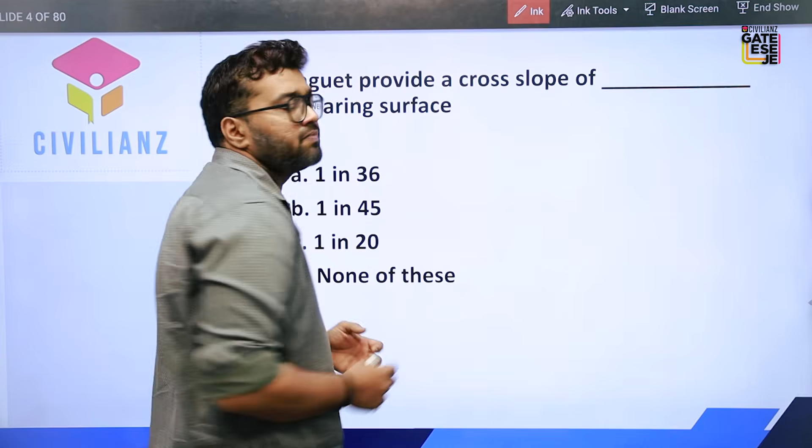Tresaguet provided a cross slope of dash to the wearing surface. So after Roman roads, then came Tresaguet method of road construction. He provided a cross slope at the wearing surface. At the top surface, he provided a slope, to drain off the rainwater.

So what is the slope provided by Tresaguet? The correct answer is 1 in 45. The cross slope provided by Tresaguet is 1 in 45, that means 1 vertical to 45 horizontal. This is the cross slope provided by Tresaguet.

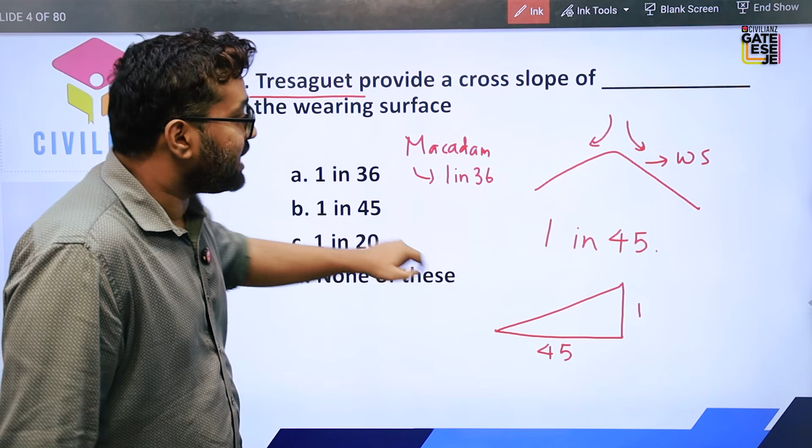One more important thing, the cross slope provided by macadam is 1 in 36. So cross slope provided by Tresaguet is 1 in 45 and cross slope provided by macadam is 1 in 36, John macadam is 1 in 36. Tresaguet provided the cross slope only at the wearing surface, but macadam provided cross slope in every layer.

So the correct answer is option B, 1 in 45. Next question.

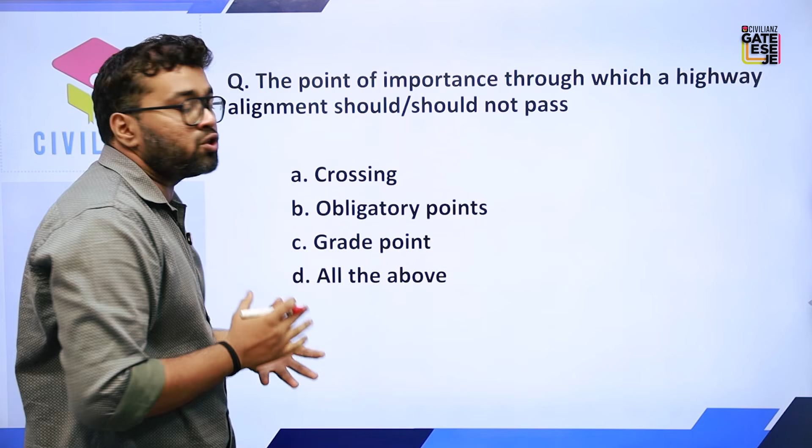The point of importance through which a highway alignment should or should not pass - what is the answer? The correct answer is option B, obligatory points. Obligatory points are some points where alignment should pass or should not pass. You should learn it.

So what is an alignment? Alignment is the position or layout of the center line of a highway, and the position depends on some points. We cannot create road everywhere. If there is a costly structure near, we cannot destroy that structure and construct a road there. So this type of points where alignment cannot pass or should pass is called obligatory points.

So the points where alignment should pass or should not pass is called as obligatory points. The correct answer is option B, obligatory points. Next question.

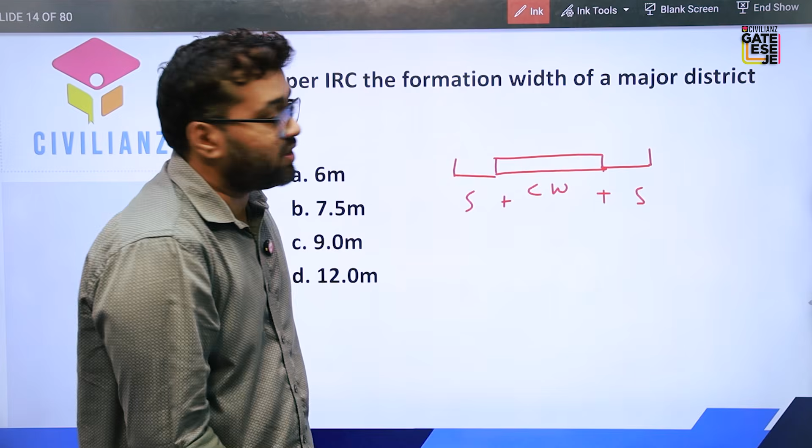So the question is, what is the formation width for a major district road? Formation width is carriageway, the pavement, plus shoulders on both the sides. The correct answer is option C, 9 meter, and we can just look at the values.

This is for plain and rolling terrain only. So first case is NH or SH, national highway or state highway - the formation width is 12 meter.

Second, for major district roads, the formation width is 9 meter. Then for other district roads: if the road is single lane, then 7.5 meter, and if it is 2 lane, then it is 9 meter.

For village roads, the answer is 7.5 meter. So you should by heart all these values: for national highway and state highway, the value is 12 meter; for major district road, it is 9 meter; for other district road, single lane 7.5 meter, and for 2 lane roads 9 meter; and for village roads it's 7.5 meter.

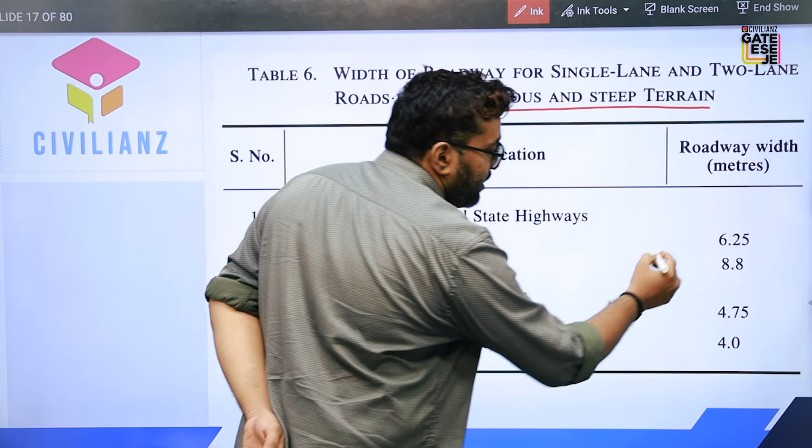This is only for plain and rolling terrain. When it comes to mountainous or steep terrain, for NH and SH - national highway and state highway - if the road is single lane, the formation width is 6.25 meter, and if it is two lane, the formation width is 8.8 meter.

For major district roads, MDR, and other district roads, ODR, the formation width is 4.75 meter, and for village road it is 4 meter. This is only for mountainous and steep terrain. So you should learn all these things, and if it's confusing, at least learn the values for plain and rolling terrain.

Next question. The recommended camber for water bound macadam is... So the question is, what is the recommended value for camber for water bound macadam? The correct answer is option B, 1 in 33 to 1 in 40. The values are given in the code. It is easy to learn, so let's just look.

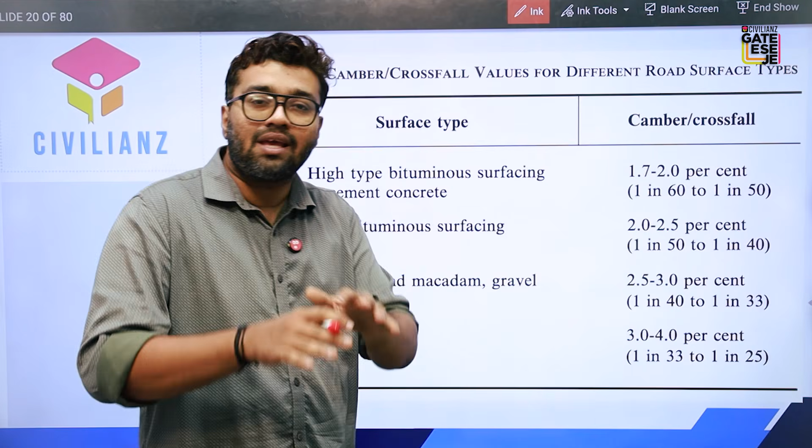The camber is the crosslope provided on the road to drain off the rainwater. So the value of camber depends on two factors: the type of pavement, and the rainfall amount in that area.

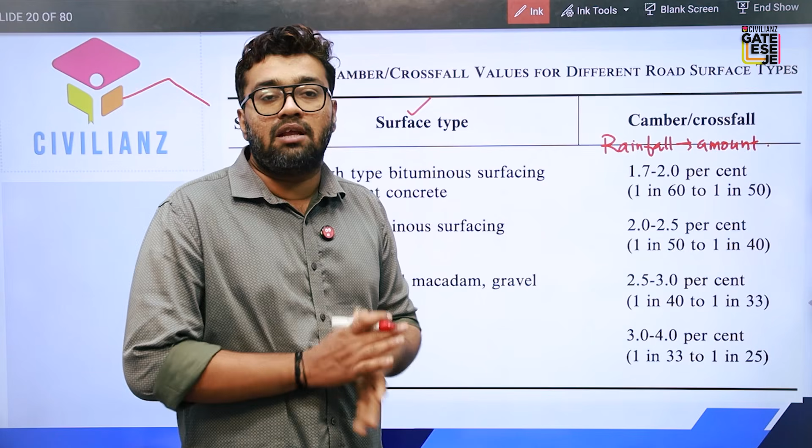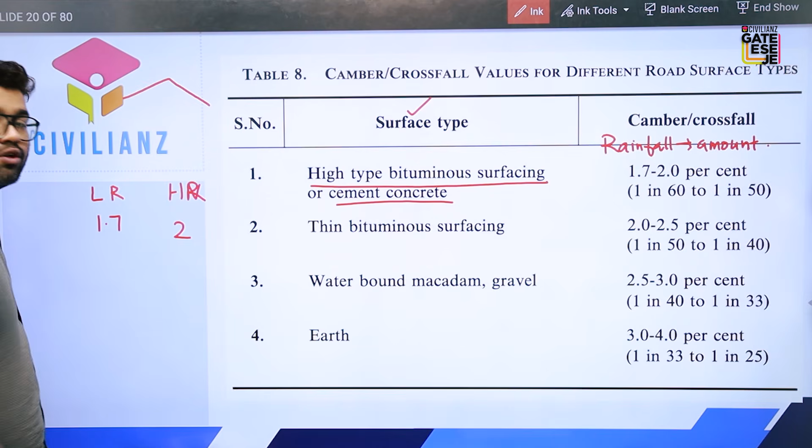We can learn these values easily. Based on amount of rainfall, we can classify it into light rainfall and heavy rainfall. The first road condition is high type bituminous surfacing or cement concrete roads: for light rainfall it is 1.7, and for heavy rainfall it is 2.

In case of thin bituminous surfacing, we should write this value here: it will be 2, and this will be more than that - 2.5. If more rainfall comes, we want to increase the slope.

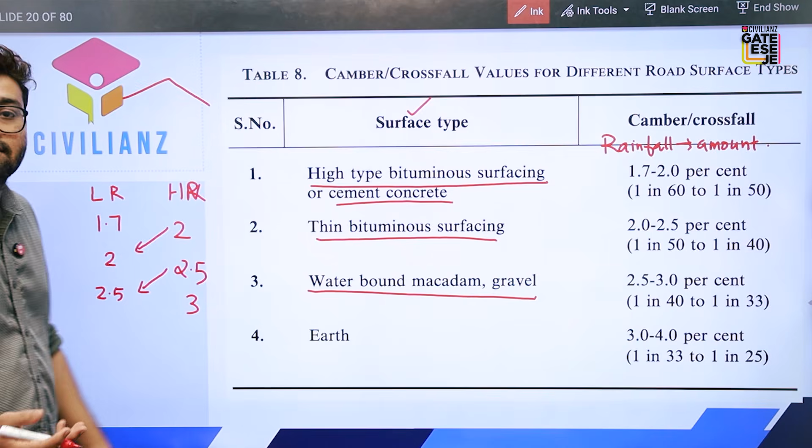Third case, water bound macadam or gravel roads: we can write this value here, 2.5, and at heavy rainfall we get 3. Last case is earthen roads: we can write 3 here, and the value here is 4. So we can easily by heart these values.

You should by heart these values, and it's given in percentage.

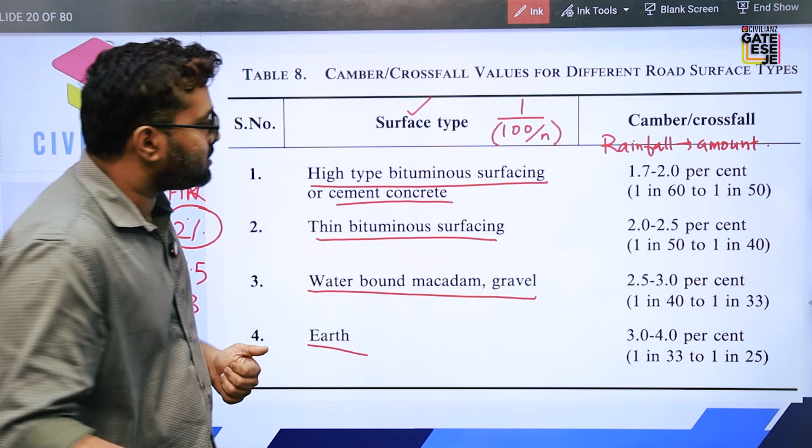For some people it will be difficult to convert this percentage to the ratio value, right? It's very simple. Just learn this equation: 1 by 100 divided by the percentage value. So in this case, it's 2%, so 1 by 100 divided by 2 is equal to 1 in 50.

Okay, we can take another value, 2.5. So what will it become? 1 by 100 divided by 2.5. 100 divided by 2.5 is 40. So the value is 1 in 40.

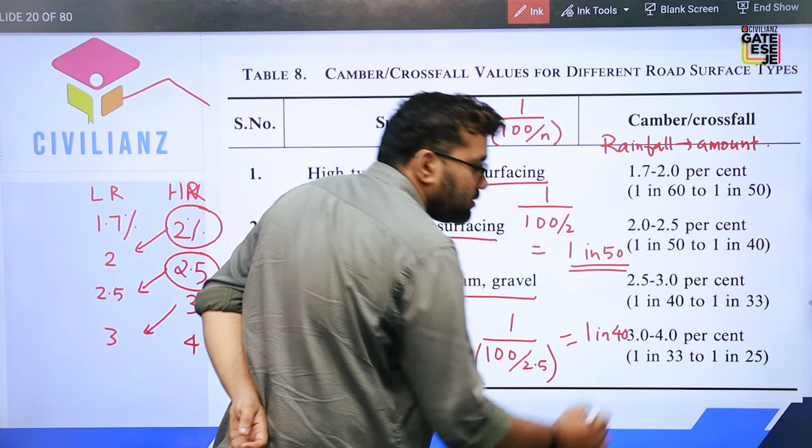It's that simple. We can take 3. Okay, 1 by 100 divided by 3. 100 divided by 3 is 33.3. So the answer is 1 in 33.3. Okay, it's that simple. So you should just learn these values.

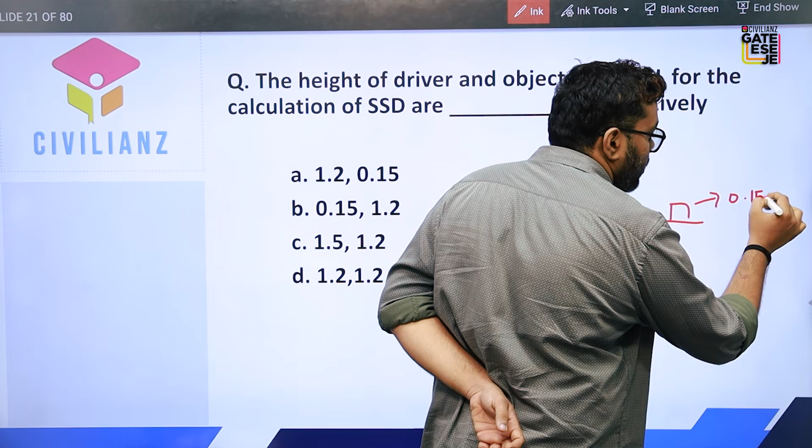Next question. The height of driver and object above ground level for calculation of stopping sight distance are dash meter respectively. Our car is going and there is an object here. Therefore, for calculating SSD, the eye level of driver is 1.2 meter, and the object is 0.15 meter. For calculating stopping sight distance, the height of observer is 1.2 meter and the height of object is 0.15 meter. So the correct answer is option A.

For calculation of OSD or ISD, the observer and the object are at a height of 1.2 meter. So for stopping sight distance, height of eye level of observer is 1.2 meter, height of object is 0.15 meter. And for overtaking sight distance, both height of observer and height of object are taken as 1.2 meter. Here it is 1.2 meter and 0.15 meter, and here it is both 1.2 meter. So the correct answer is option A: 1.2 meter and 0.15 meter.

Okay, next question. What is the safe SSD required for a vehicle traveling with a speed of 100 km per hour under ideal condition? So we know the equation, right? Vt plus V square by 2gf, where V is the design speed in meter per second.

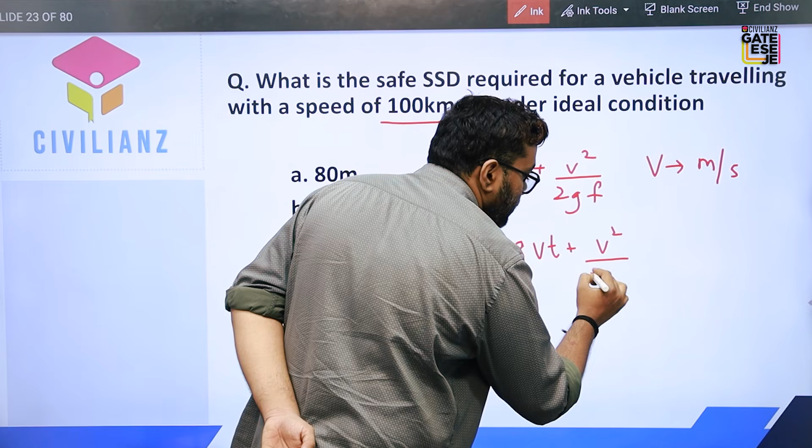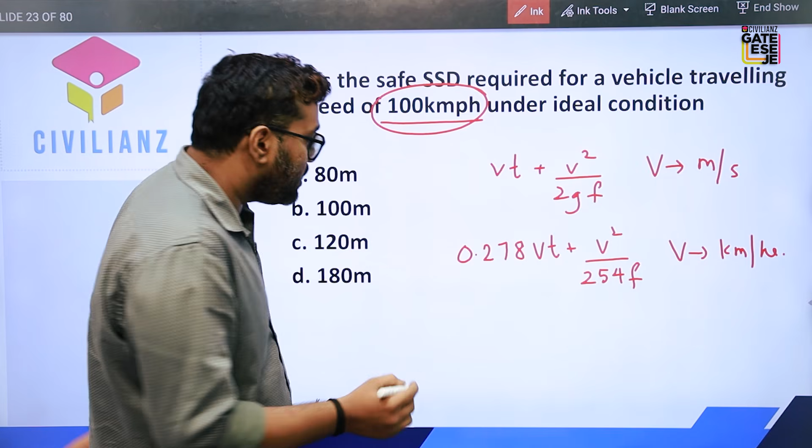Otherwise, you know another equation: 0.278Vt plus V square by 254f, where V is in kilometer per hour. We know two equations; we can use either of them to solve this. In this question, it's given 100 km per hour, but other values, the time is not given and the coefficient of friction is not given.

But we know that for 100 km per hour, the friction value is 0.35 and the time is 2.5 seconds. We know these values, so we can either substitute them and find the answer, or we can just refer the codal values. Let's check. So the correct answer is 180 meter. We can come to it.

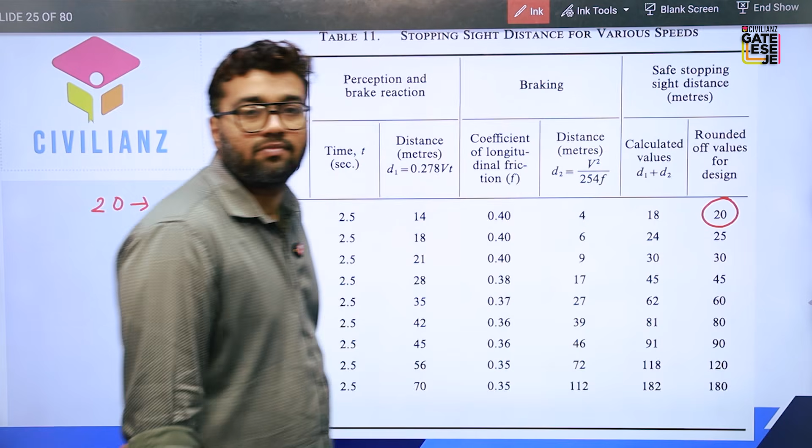For design speed 20, the stopping sight distance is 20. For design speed 25, stopping sight distance is also 25. And for 30, the value is 30. So it is easy to learn these three values, right?

Then we go to 40. When the design speed is 40, we have an easy formula: we can just add 5 to it. We will get 45.

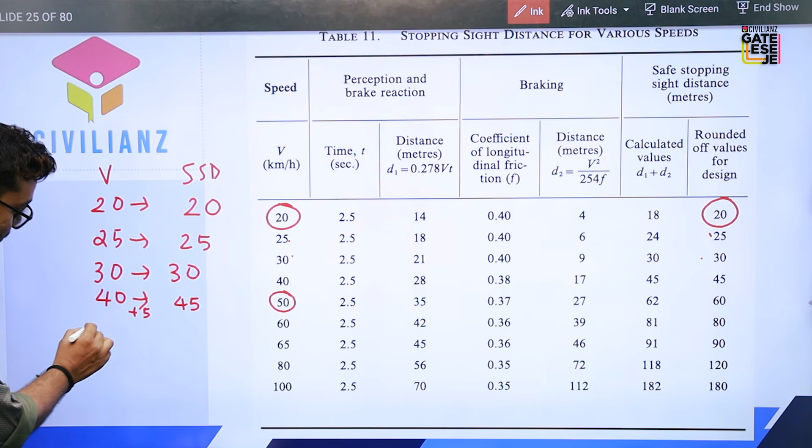Then when design speed is 50, we can add 10 to it; we will get 60. For design speed 60, we can add 20 to it, so it will become 80.

For 65, we should learn it separately: for 65, it will be 90. We can just leave that aside.

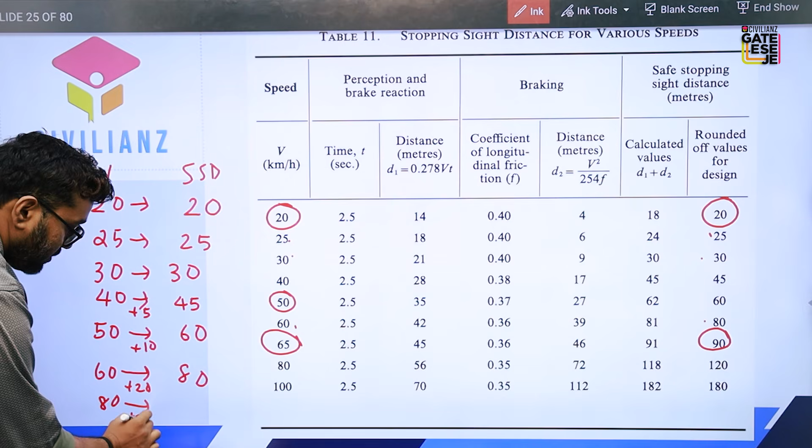For 80, we can add double of 20, which is 40, so we get 120. And then for 100, we add here 40, right? We can add 80, so we'll get 180. So these values are easy to learn by heart.

You can just look at this pattern and it's easy to learn. For the first three values, up to design speed 30, the design speed and stopping sight distance will be equal. After that, for 40 we add 5, for 50 we add 10, for 60 we add 20, for 80 we add 40, and for 100 we add 80. Double of 5 is 10, double of 10 is 20, double of 20 is 40, and double of 40 is 80. So it is easy to learn these values. Just remember, for 65 it is 90. Okay, next question.

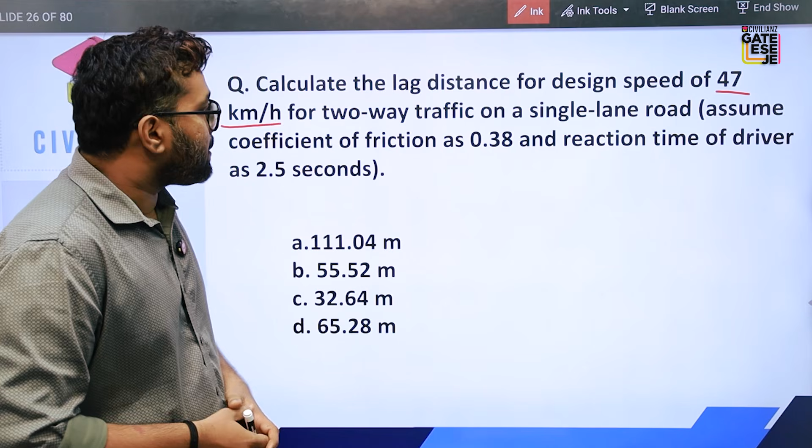Calculate the lag distance for the design speed of 47 km per hour. The design speed is 47 km per hour for two-way traffic on a single lane road.

Coefficient of friction is 0.38 and reaction time is 2.5 seconds. Okay, we can do the question.

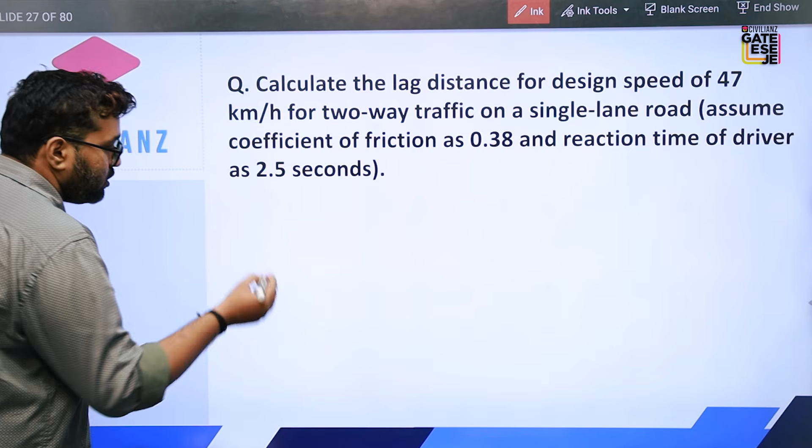Okay, we know the equation, right? SSD is equal to Vt plus V square by 2gf, where V is in meter per second.

So in this equation, this represents the lag distance, and this represents the braking distance.

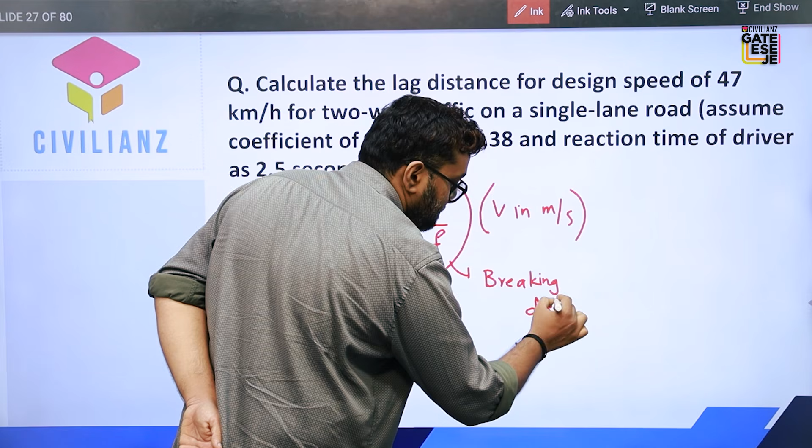So when we are going in a car and we suddenly see an object in front, we will just see the object and then apply brake. The time between seeing the object and application of brake is called the reaction time. And in this time, the vehicle will move at the same speed. The vehicle will be slowed down only after the brake is applied.

So the distance moved in the reaction time is called the lag distance. So in this question, only the lag distance is asked. So we can just write lag distance is equal to V into T, where V is in meter per second.

We can convert. Here the question is given as 47 km per hour, so we can write it as 47 into 5 by 18. To convert kilometer per hour into meter per second, we just multiply by 5 by 18.

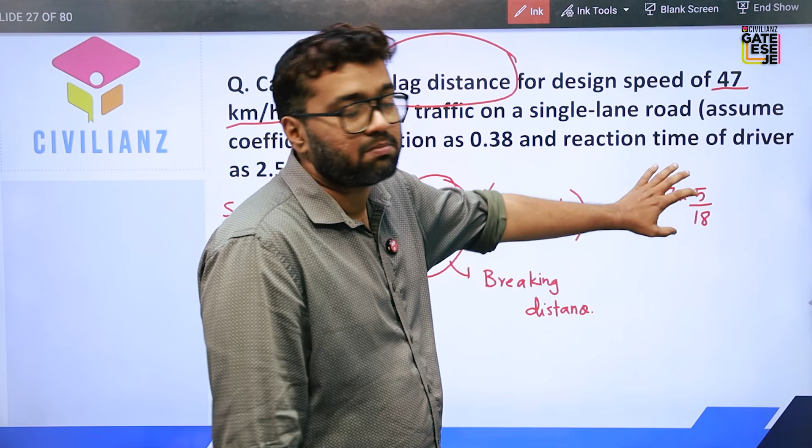Then T is given as 2.5 seconds, the reaction time. So we can just substitute: lag distance is equal to velocity 47 into 5 by 18 into t, time is 2.5 seconds. We can just multiply it.

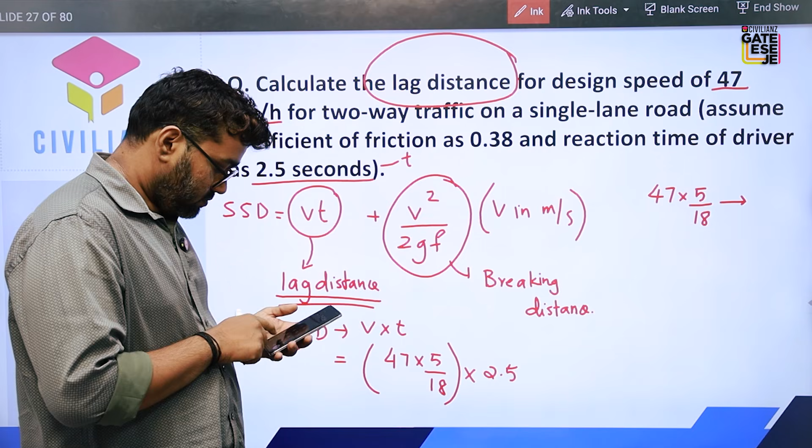So we will get the answer 32.64 meter. But there is a problem.

We know that it's a two-way traffic, right? It's a two-way traffic on a single lane road. So vehicles are coming from both directions.

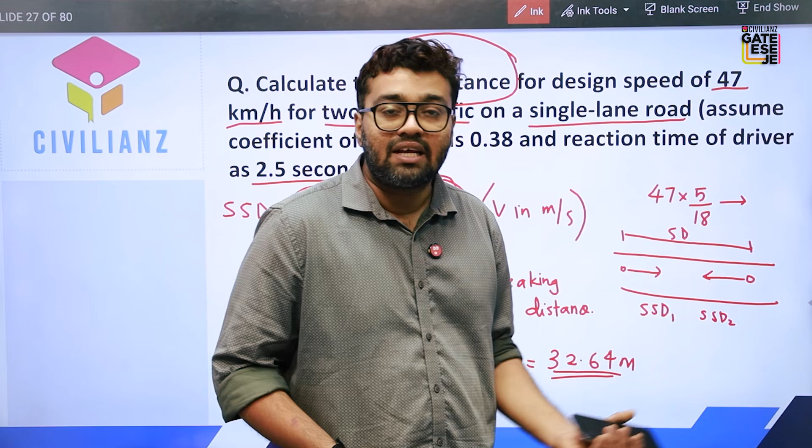So the minimum sight distance should be SSD of this vehicle plus SSD of that vehicle. Otherwise, if two vehicles come and we are not providing enough SSD, what happens? The first vehicle will apply brake and it requires minimum SSD1 to stop, and the second vehicle requires SSD2. If both these values are not given, the vehicles will collide. So the minimum required distance is SSD1 plus SSD2.

But it's the same road, right? Same road, same design speed. So we can write SSD plus SSD. Both SSD1 and SSD2 will be equal, so it's equal to 2 into SSD. For a single lane road with two-way traffic, the minimum sight distance available should be 2 into SSD.

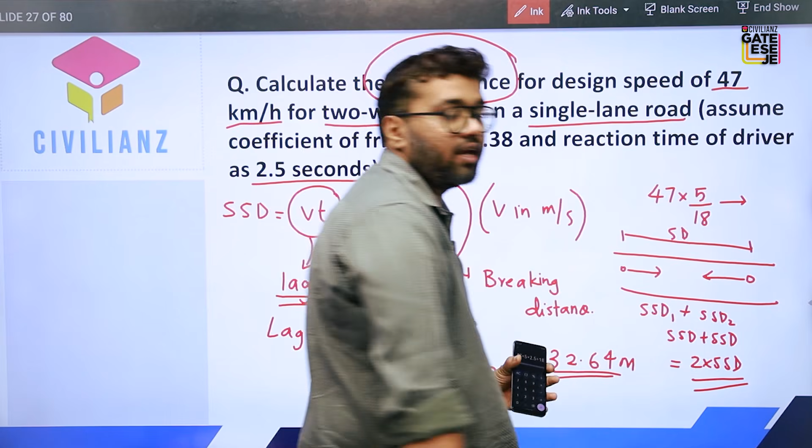Otherwise, the vehicle will collide. If you are providing only one SSD, one vehicle can stop, but the second vehicle will collide.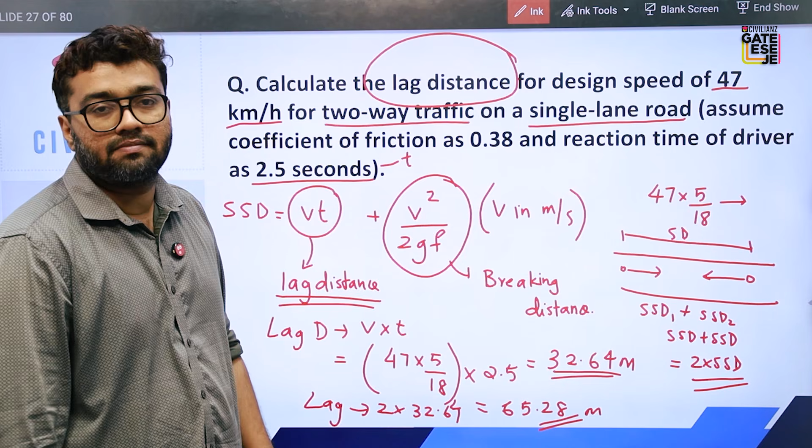So here we can just multiply, the lag distance will be 2 into this value, 32.64. So it will be 65.28. The value will be 65.28. Okay, so you get the solution.

So the correct answer is option D, 65.28. Shall we move to the next question?

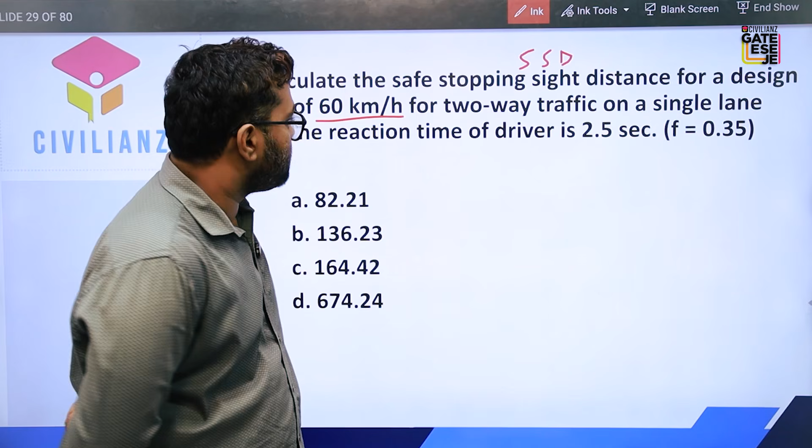Okay, so the next question: calculate the safe stopping sight distance, SSD, for a design speed of 60 km per hour. Design speed is 60 km per hour for a two-way traffic on a single lane road.

So in this question also, it is two-way traffic on a single lane road. So SSD, the minimum sight distance, is 2 into SSD. So remember it, okay? Remember it. For a single lane road with two-way traffic, the minimum sight distance is 2 into SSD.

The reaction time is 2.5 seconds and coefficient of friction is given as 0.35. So it's a simple question. We just want to find the stopping sight distance and we know the equation.

The design speed is given in kilometer per hour, so we can write the equation SSD is equal to 0.278 Vt plus V square by 254F. It will become 0.278 into velocity 60 and reaction time 2.5 seconds, plus 60 square divided by 254 into F value 0.35. It's a simple equation, you can find the answer.

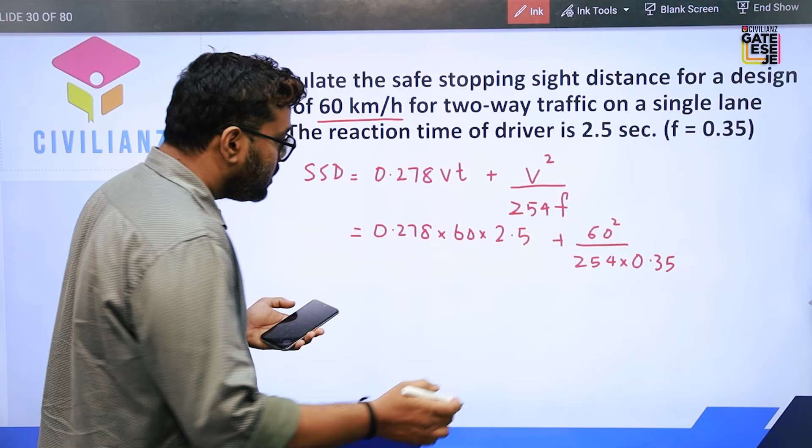The value will become 82.19. But in the question it is two-way traffic on a single lane road.

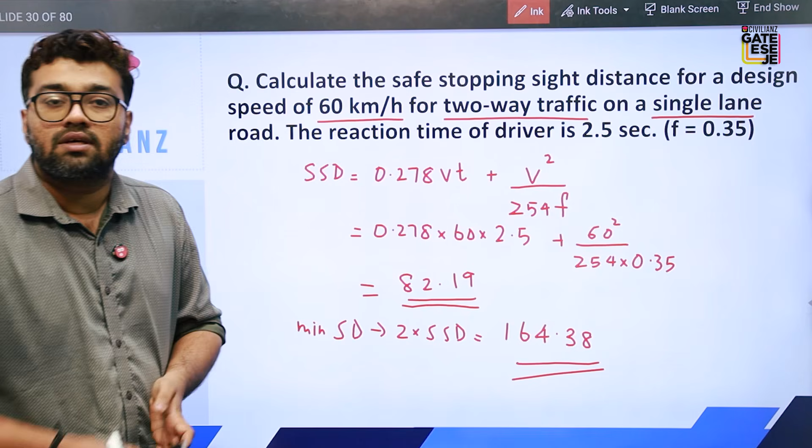So minimum sight distance is equal to 2 into SSD. It's equal to 164.38. So the correct answer is option C, 164.42.

Okay, next question. Two cars are moving in opposite directions with a speed of 25 meter per second and 20 meter per second. The first car is moving at 25 meter per second and the second car at 20 meter per second. If total reaction time is 2.5 seconds...

Design coefficient of friction is 0.35. Then what must be the minimum sight distance to avoid collision?

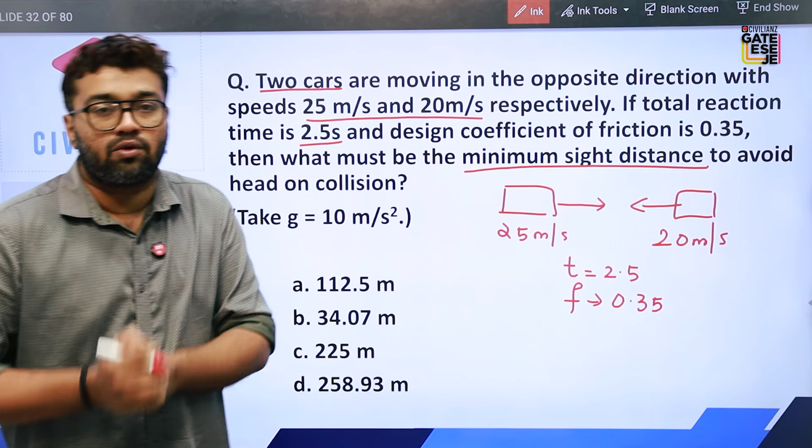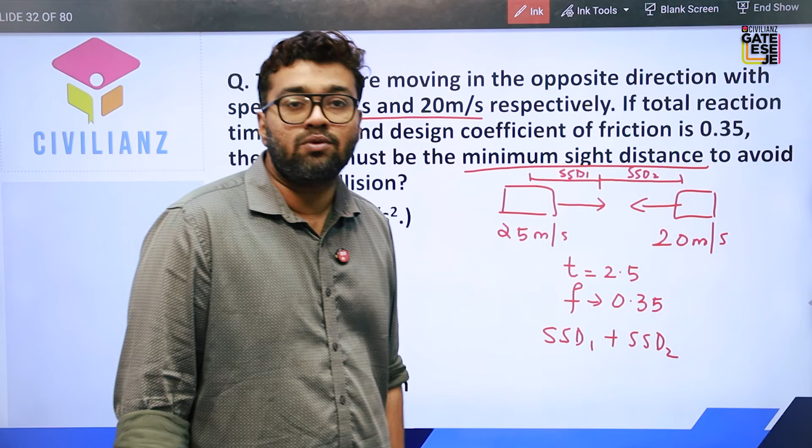If both vehicles are coming in opposite directions, minimum sight distance required is: if the first vehicle applies brake, it should stop, and the distance where it stops is SSD1. If the second vehicle applies brake, it should stop at distance SSD2. So minimum distance that should be available to avoid the collision is SSD1 plus SSD2. We can find SSD1 and SSD2 and then add the values. It's that simple.

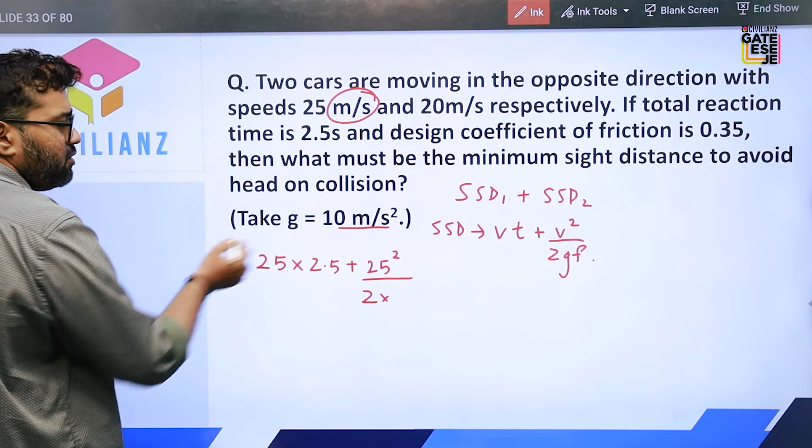SSD1 plus SSD2. The SSD equation is SSD equal to Vt plus V square by 2GF, because the speed is given in meter per second. So SSD1: the first vehicle is moving at 25 meter per second, so 25 into reaction time 2.5 plus 25 square divided by 2 into G value 10 into F 0.35. This is the equation for SSD1.

Then SSD2 is again, velocity 20 into 2.5 plus 20 square divided by 2 into 10 into 0.35. Okay, we can just calculate it.

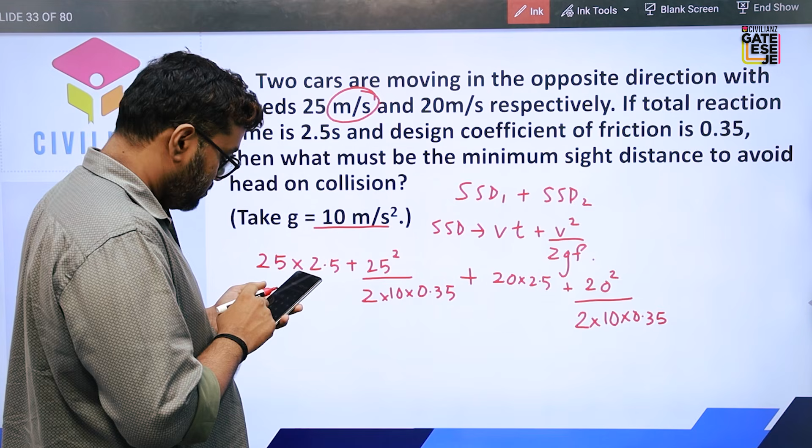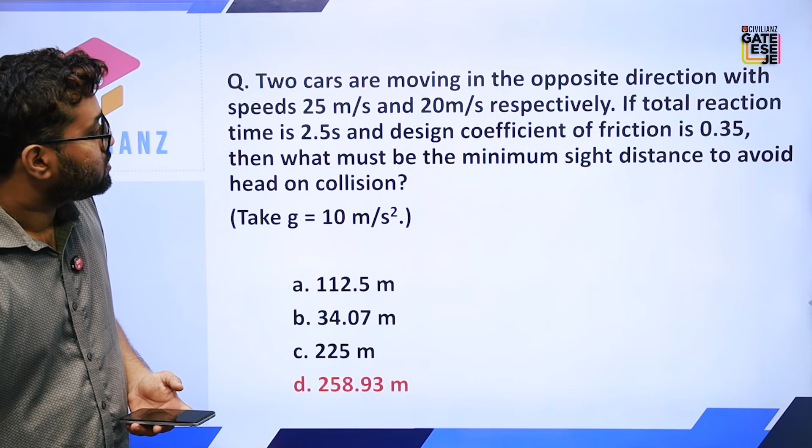So we will get the answer as 258.93 meter to avoid collision. So the correct answer is option D, 258.93 meter. Okay, we can go to the next question.

Calculate the safe stopping sight distance for a descending gradient of 3%, for a design speed of 80 km per hour, taking coefficient of friction as 0.35 and total reaction time as 2 seconds. Normally we take it as 2.5 seconds, but here it's given as 2 seconds, and the coefficient of friction is 0.35. So we can write the answer.

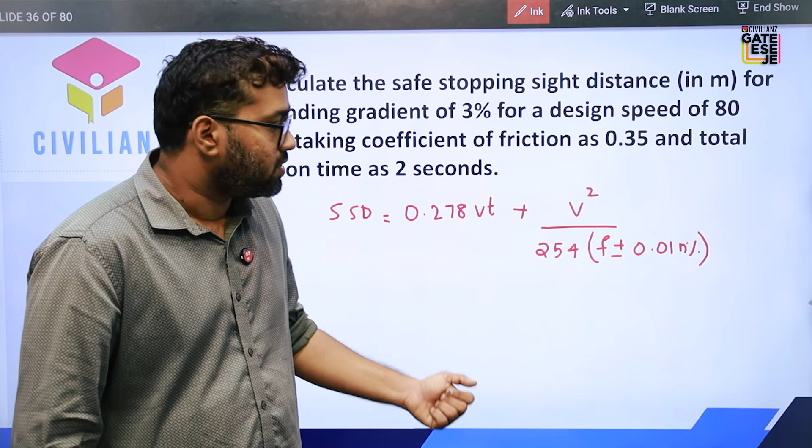We know the equation. The speed is given in kilometer per hour, so we can write the equation of SSD as 0.278 Vt plus V square by 254 into F, plus or minus 0.01 into n percentage. This is the equation for ascending and descending gradient. For descending gradient we put a negative symbol. So this is the final equation.

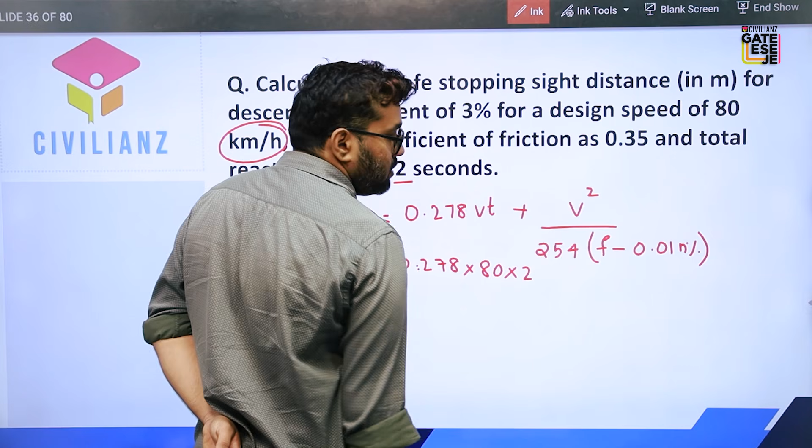We can just substitute the values: 0.278 into velocity 80 and time 2 seconds, plus 80 square divided by 254 into F value 0.35, minus 0.01 into n value in percentage. So 0.01 into 3 is equal to 0.03. This is the equation, we can find the answer.

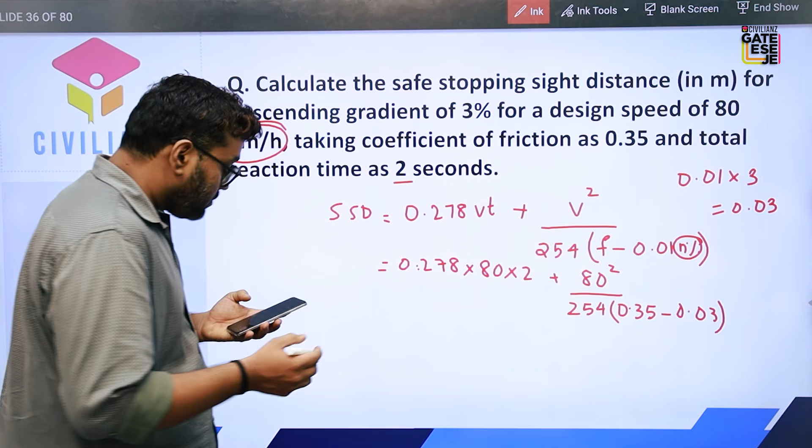It is equal to 123.22. If you know the equation, it's very easy. For descending gradient it will be negative, and for ascending gradient it will be positive. So the answer is option B, 123.22 meter. Okay, next question.

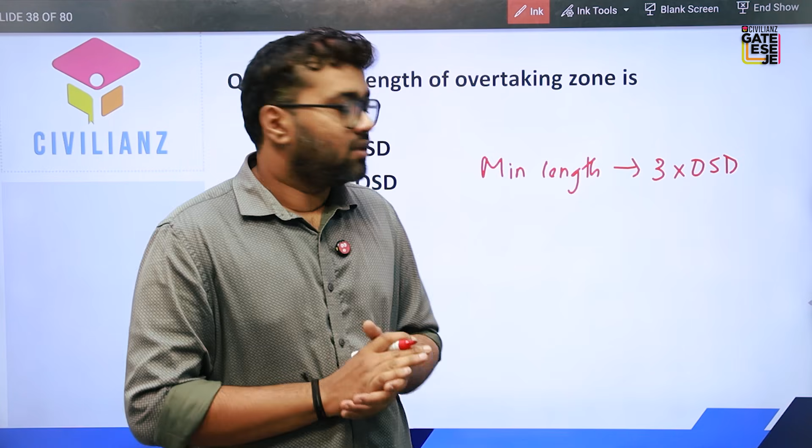The minimum length of overtaking zone: we know the minimum length of overtaking zone is 3 into OSD. On some roads we cannot provide overtaking at every place, so we put a board like 'no overtaking.' In that case, we provide overtaking zones at regular intervals. The minimum length should be 3 into OSD and the desirable value is 5 into OSD. So in this question, it is asked what the minimum length is, so the minimum length is 3 into OSD. Okay, next question.

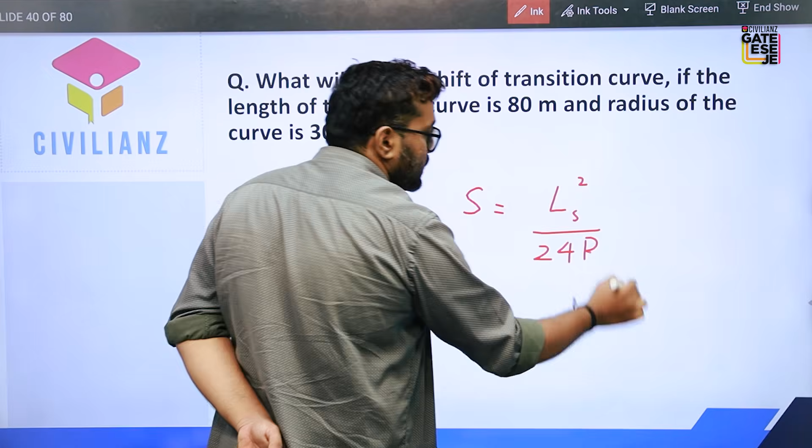Okay, what will be the shift of transition curve if the length of transition curve is 80 meter and radius of curve is 300 meter. We know what is a shift, right? When we are providing a transition curve, the road will just move inwards, so we should adjust the circular curve to a distance inside. This distance is called the shift. The equation for shift is S equals length of transition curve square divided by 24 into radius of curve.

What do you mean by shift? The circular curve should be put inwards because the transition curve was brought in place. As the transition curve was brought, the curve should be shifted inwards. This is called the shift.

In this question, the length of transition curve is given as 80 meter and the radius of curve is given as 300 meter. So we can write 80 square divided by 24 into 300. That is 0.89. So the correct answer is option C, 0.89.

Next question. If the speed of the vehicle is doubled on a horizontal curve, then what will be the change in centrifugal force?

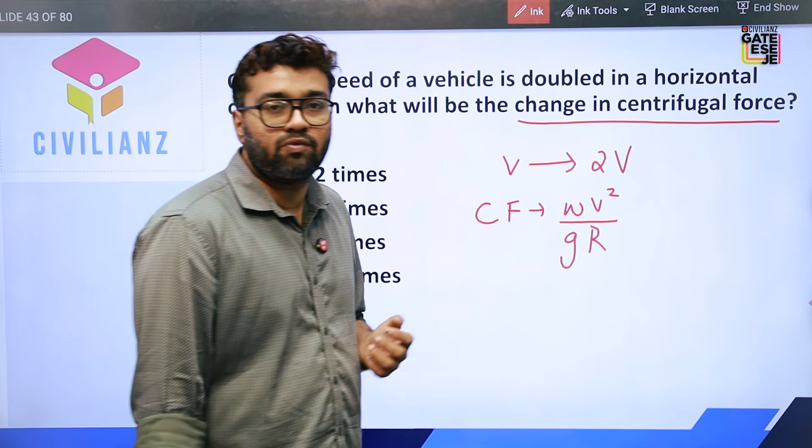We know the equation for centrifugal force as WV square by GR, where W, the weight of vehicle, is constant, G value is constant, and the radius for this curve is constant. So three values are constant, and only the speed of vehicle is doubled, 2 times. So V square, when V changes to 2V, the whole square becomes 4V square. So the centrifugal force changes to 4 times the centrifugal force. So the correct answer is option B, 4 times.

Okay, next question. In equilibrium superelevation, the tire pressure of outer wheel in relation to the inner wheel will be.

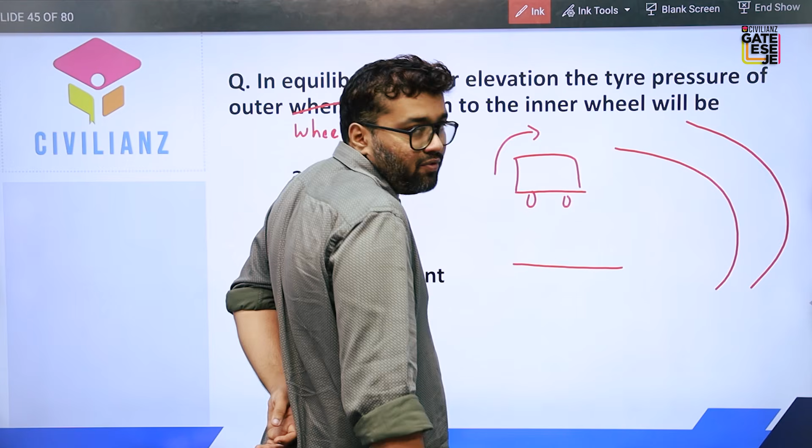So when we are moving in a horizontal curve, the vehicle will have a tendency to overturn. So if you are providing a straight road without superelevation, then due to this overturning, the pressure will be more on the outer wheels. So what we will do? We will provide superelevation.

A component of weight will act in this direction, and centrifugal force will act in this direction. When we are providing equilibrium superelevation, these two values will be in equilibrium. Therefore the pressure will be equal in both the wheels. So when we are providing equilibrium superelevation, the pressure on both wheels will be equal, and if we are not providing superelevation, the pressure will be more on the outer wheels. So here the correct answer is option A, equal.

Okay, next question. For the design of superelevation, for mixed traffic condition, the speed is reduced by how much. So we know the equation.

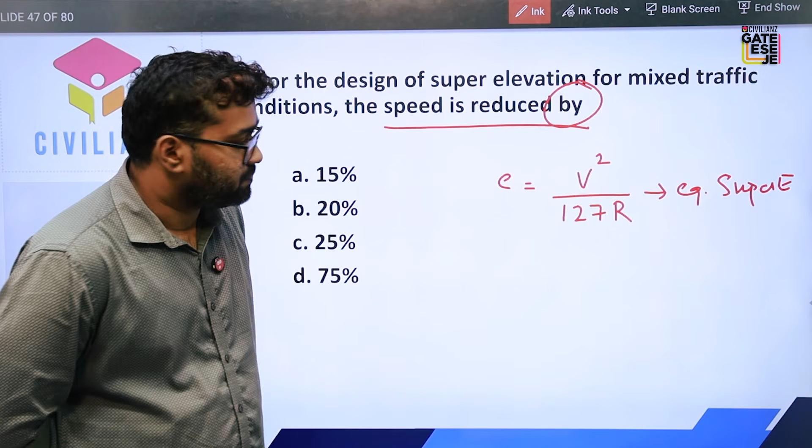Equilibrium superelevation is equal to V square by 127. So for calculating superelevation for mixed traffic condition, we will reduce the velocity to 0.75V. We get the equation as 0.75V square divided by 127R, which is equal to V square by 225R.

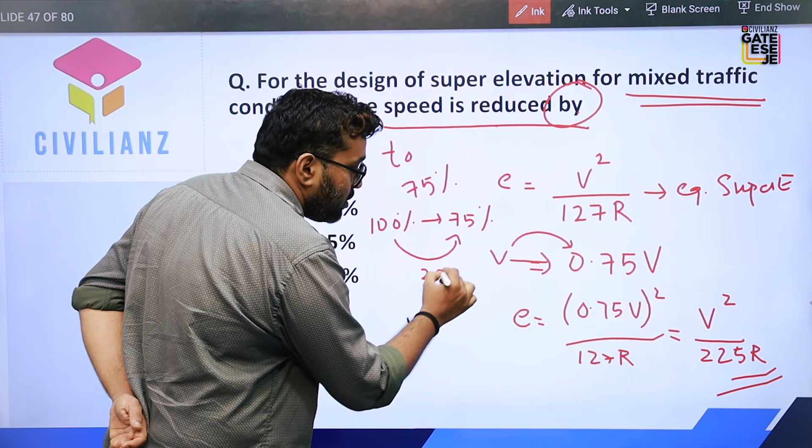So the velocity is reduced to 75%. Initially the velocity was 100% and it is reduced to 75%. But the question here is reduced by how much. It is reduced to 75%, so the value is reduced by 25%. 100% is reduced by 25% to get 75%. So the correct answer for this question is 25%.

Don't get confused. If the question was 'reduced to', then the answer is 75%. But in this question it is asked 'reduced by', then it will be 25%. From 100%, 25% is reduced to get 75%.

Okay, next question. As per IRC, maximum limit of superelevation in plain and rolling terrain and snow-bound areas is 0.07, or 7%.

So for codal values, we can just look. For plain and rolling terrain, maximum superelevation is 7% or 0.07. For snow-bound areas, the maximum value is also 7%. For hilly areas, meaning mountainous and steep areas not bound by snow, the value can be 10%. So maximum superelevation is 10% for hilly areas with no snow, and 7% for plain, rolling, and snow-bound areas.

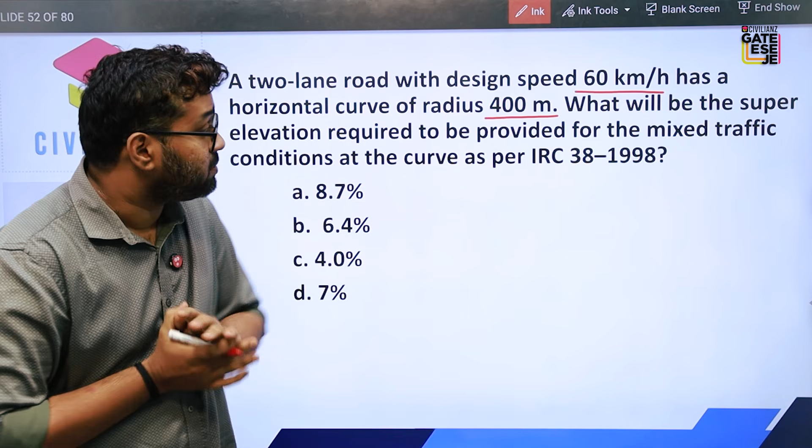Okay, next question. A two-lane road with design speed of 60 km per hour has a horizontal curve of radius 400 meter. What will be the superelevation required for the mixed traffic condition? So the question is asking for design superelevation at the curve as per IRC 38-1998.

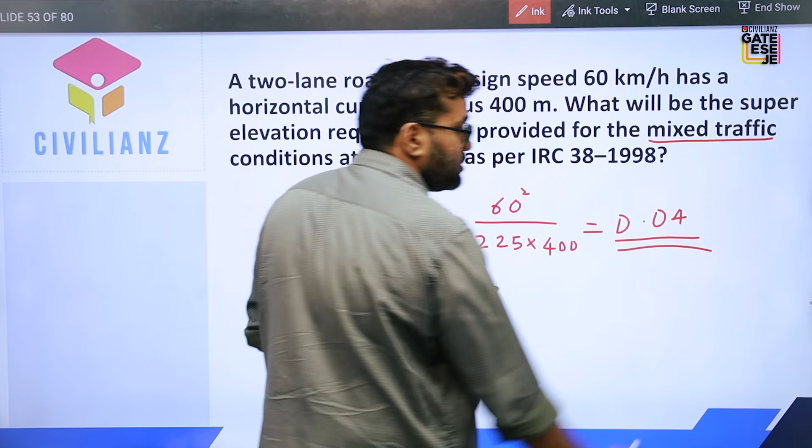We know the equation for design superelevation for mixed traffic condition: V square by 225R. Velocity is given as 60 km per hour, substituted in km per hour, divided by 225 into radius which is given as 400. This is equal to 0.04, or 4%. So if you know the equation, it's very simple.

The equation for equilibrium superelevation is V square by 127R, but the question asks for mixed traffic condition, meaning design superelevation, which is V square by 225R. Equilibrium superelevation is V square by 127R. So the correct answer is option C, 4%.

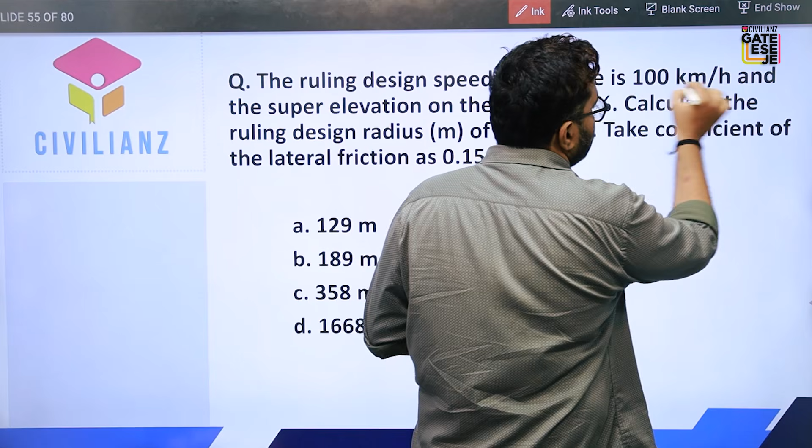Next question. The ruling design speed of a curve is 100 km per hour and the design superelevation is given as 7%. Calculate the ruling design radius of the curve. Take coefficient of lateral friction as 0.15.

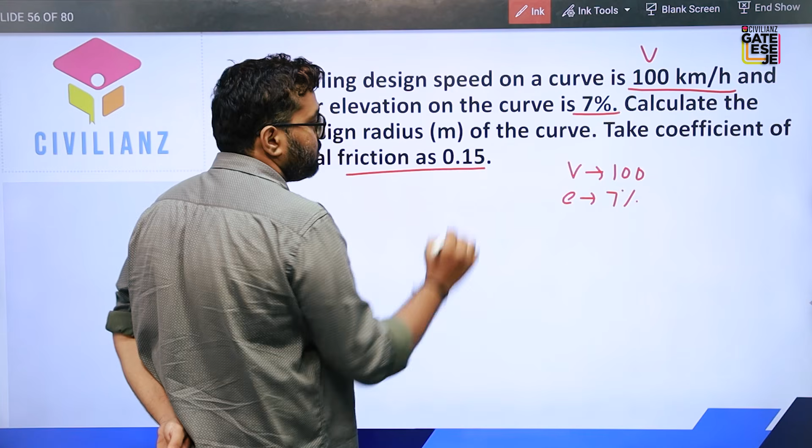So here the given values are: V is equal to 100, superelevation E is equal to 7%, and coefficient of friction F is equal to 0.15. We want to find the minimum radius. We know the general equation: E plus F is equal to V square by 127R. If you know the equation, we can rearrange to get R is equal to V square by 127 into E plus F.

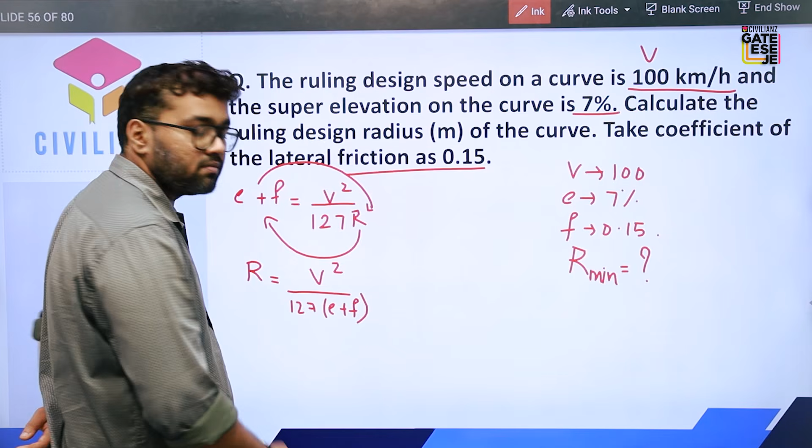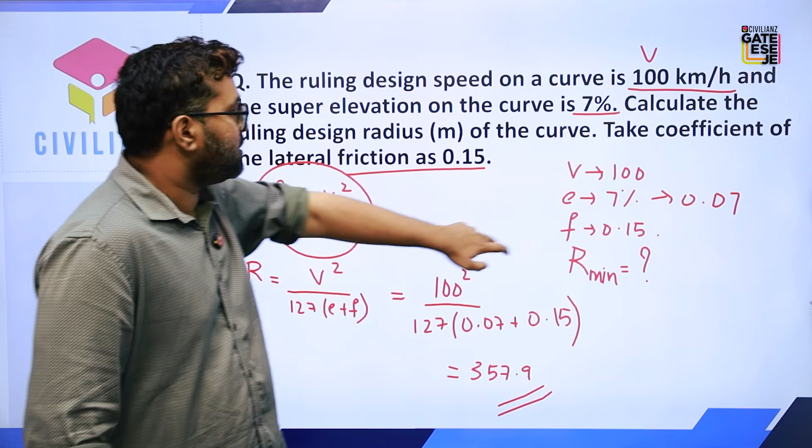The value of V is 100, so 100 square divided by 127 into E plus F, where E is 7% or 0.07, and F is 0.15. We don't need to derive the whole equation, we can just use this formula directly. So the answer comes out to 357.9, and the correct answer is option C, 358.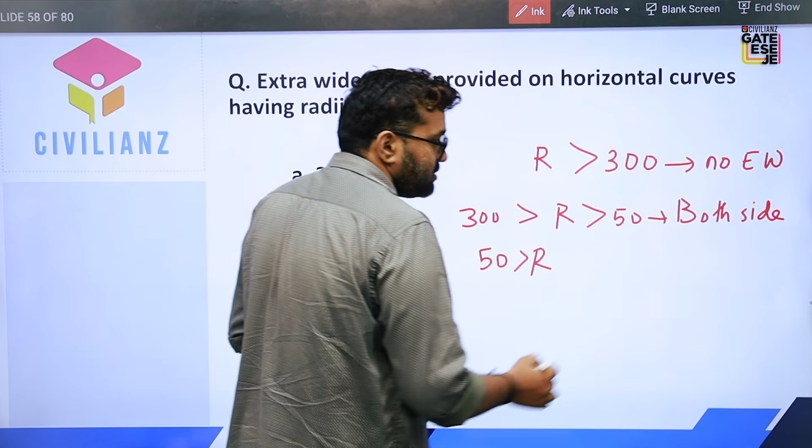Next question. Extra widening is provided on horizontal curves having radius less than what value? If radius is greater than 300, no extra widening is required. If radius is less than 300 and greater than 50, we provide extra widening equally on both sides. If radius is less than 50, then the widening is provided only on the inner side. So the question asks for extra widening on curves with radius less than 300, and the correct answer is option A, 300.

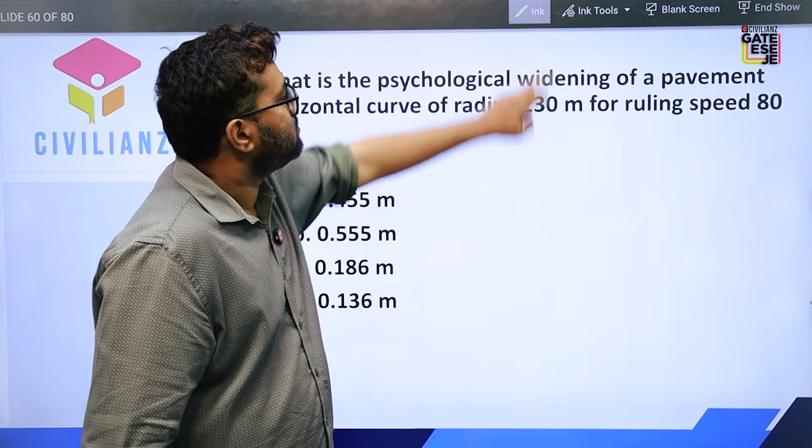Next question. What is the psychological widening on a pavement on a horizontal curve of radius 230 meter for a ruling speed of 80 km per hour? The equation for psychological widening is V by 9.5 root R, where V is in kilometer per hour. So here V is given as 80, divided by 9.5 root 230. Okay, let's check the calculation.

Zero point five five five, 0.555. So the correct answer is option B, 0.555.

Next question. What is the total extra widening required for a pavement of width 7 meters on a horizontal curve of radius 100 meters, if the longest wheelbase is 7 meters and design speed is 50 km per hour?

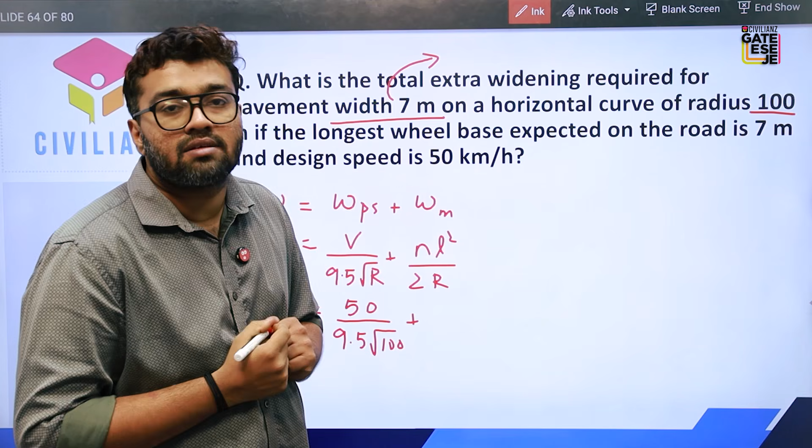So V value, V is given as 50, divided by 9.5 root R. R is given as 100. And then N value, N is number of lanes. Here number of lanes is not given, but width is given as 7 meters. Width is 7 meters means it is a 2-lane road.

So N is equal to 2. 2 into L, L is the wheelbase, the distance between both wheels, it's equal to 7 meters. 7 square divided by radius, given as 100. Okay, you can just check.

It will be 1.01 meter. So the correct answer is option C, 1 meter. Next question.

The value of ruling gradient in plain terrain as per IRC, the value is 1 in 30. We can just look, this value is also easy to learn.

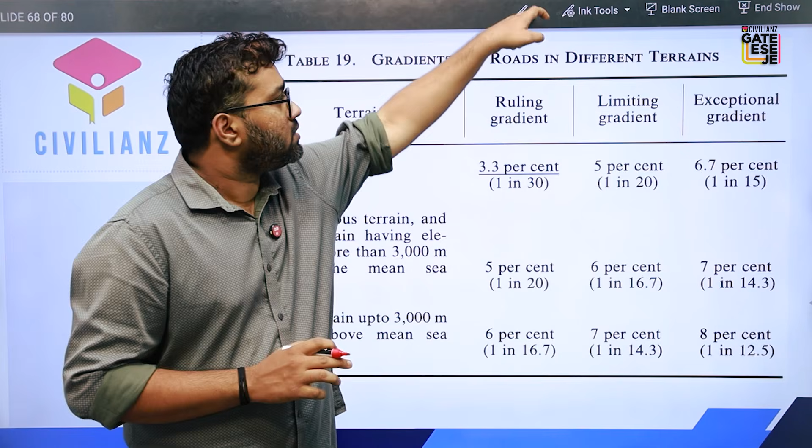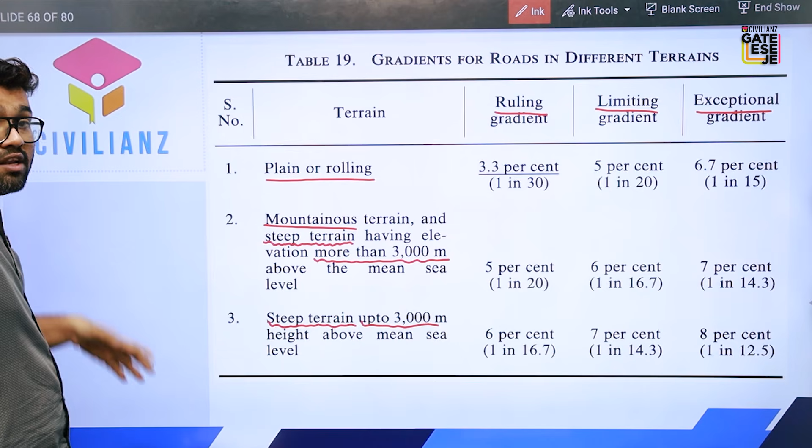It's ruling gradient, limiting gradient, and exceptional gradient - low ruling, limiting, and exceptional gradient. Here it's plain and rolling terrain, mountainous terrain, and steep terrain more than 3,000 meter, steep terrain more than 3,000 meter, and this is steep terrain up to less than 3,000 meter. Here is plain and rolling terrain, it is mountainous terrain, and steep terrain more than 3,000 meter from mean sea level, and here it is steep terrain less than 3,000 meter from mean sea level.

Okay, so the value is easy to learn. Just put 5, 6, 7. Okay, then here again put 5, 6, 7. Okay, then here it's 7, right? So 6, 7, 8. It's very easy to learn, and we just want to learn these two values, 3.3 and 6.7.

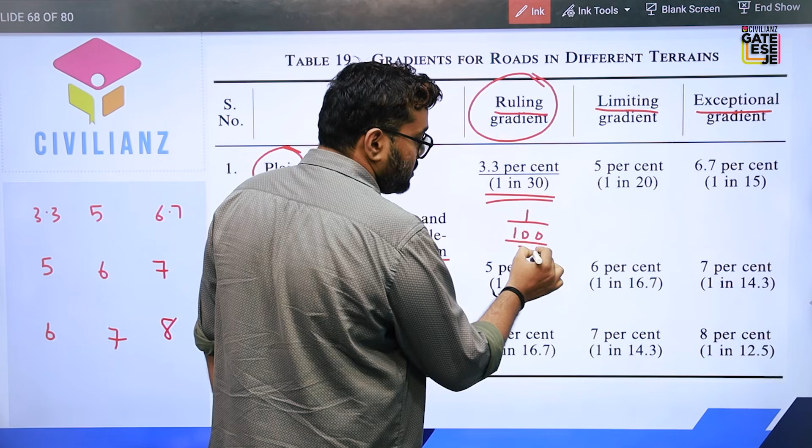So our question was, what is the ruling gradient for plain terrain? For the plain terrain, the value is 1 in 30. Okay, I already said, if you want to find, just write 100 divided by 3.3, it will be 1 in 30. So the correct answer is option D, 1 in 30, and the values are easy to learn.

Next question. The ruling gradient is 1 in 20. So the gradient is 1 in 20. 1 in 20 means 5%, 100 divided by 20 is equal to 5%.

What is the compensated gradient for a radius of 120 meters? So compensated gradient, grade compensation is equal to, so question is compensated gradient. So the equation for grade compensation is equal to 30 plus R by R, maximum 75 by R. So the value is 30 plus, the value for R is 120, 120 divided by 120.

Maximum 75 by 120. Okay, so this will become 1.25, but the maximum value is 0.625. So the maximum value is 0.625. So this is greater, right? This is greater. So we can take grade compensation as 0.625.

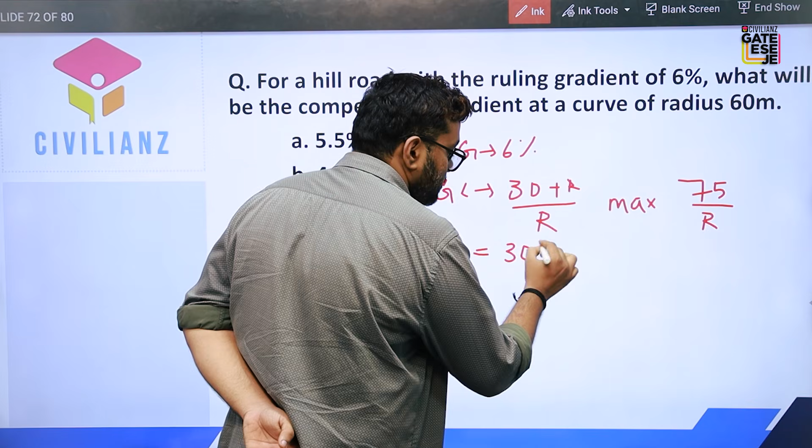For a hilly road with ruling gradient 6%, what will be the compensated gradient for a radius of 60 meters? So we can write grade compensation is equal to 30 plus R by R, maximum 75 by R, is equal to 30 plus 60 divided by 60, maximum 75 by 60. So 90 by 60 is 1.5 and the maximum 75 by 60 is 5 by 4, 1.25.

Okay, so we can take just 1.25. So the value, compensated grade is equal to 6 minus 1.25, is equal to 4.75. Correct answer is option C, 4.75%. Next question.

What is the type of curve used to connect a +1 and -2 gradient? The first gradient is +1, which means an ascending gradient. The second one is negative, so it is a descending gradient. For connecting an ascending gradient and a descending gradient, can we provide a valley curve? No, we cannot provide a valley curve. We can only provide a summit curve.

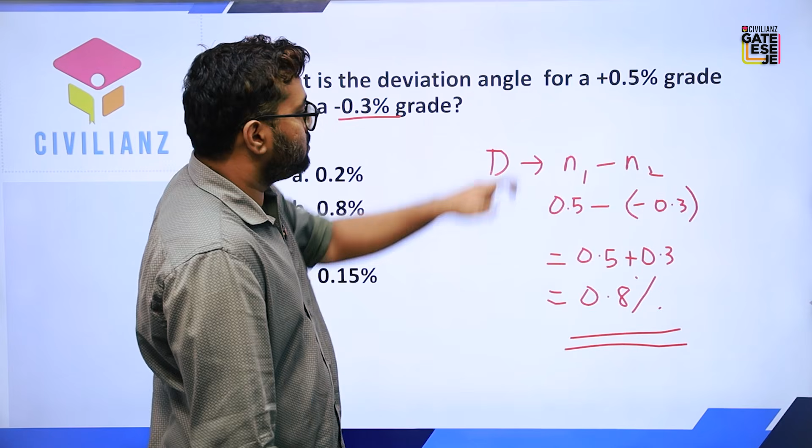What is the deviation angle for +0.5% meeting a -0.3% gradient? This is very simple. The equation for deviation angle is first gradient minus second gradient. We don't need to draw anything, just write first gradient minus second gradient. So first gradient is 0.5, minus second gradient which is -0.3. That becomes 0.5 plus 0.3, which equals 0.8%. It's very simple to do this question. So the answer is option B, 0.8%.

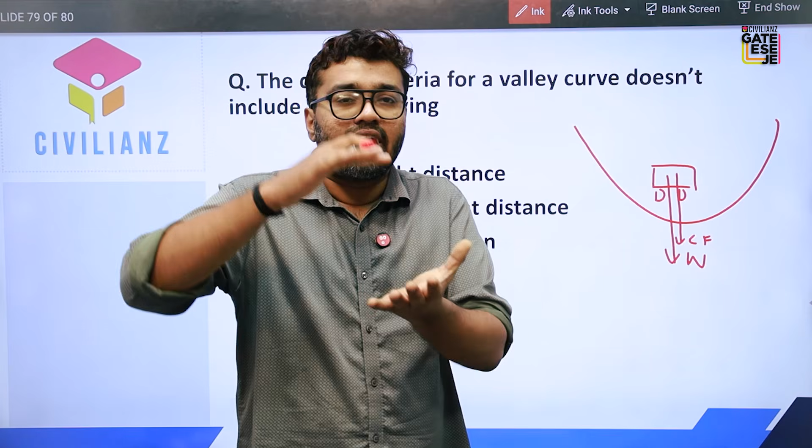Next question: the design criteria for valley curve doesn't include which of the following? We know this is a valley curve, and when the vehicle is coming, the weight will be acting downwards. Centrifugal force will be acting outside of the curve, so it also will be acting downwards. Both centrifugal force and weight are acting downwards. So when we come like this, a lot of weight is on the vehicle and there will be a comfort issue - a sudden issue for comfort. So the first criteria is comfort criteria.

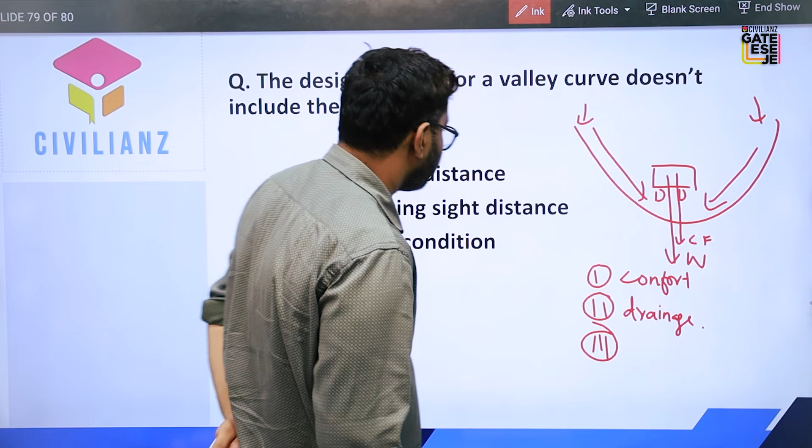Second, what if rain comes? All the water will go down, so the second criteria is drainage. The third criteria: this is a valley curve, and when a vehicle is coming, the headlight will shine like this. If a vehicle is here, this vehicle cannot see it. So the third criteria is headlight sight distance. If you provide the valley curve like this, then vehicles will collide. So we want to provide it so that minimum stopping sight distance is available.

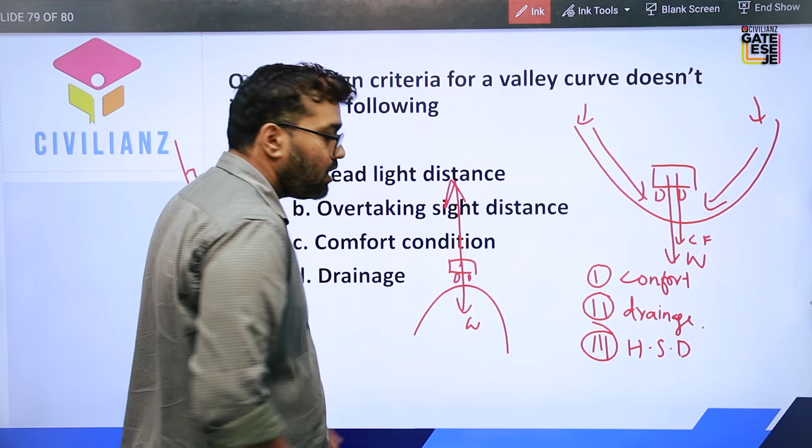So we want to design for comfort criteria, drainage criteria, and headlight sight distance. But when we consider the summit curve, there's no comfort criteria issue because centrifugal force acts upwards and weight acts downwards. When water comes, it will go down, so no drainage issue. Then there's no issue for headlight either. The only issue is the sight distance - minimum sight distance should be available. When the vehicle is here, it should see the other vehicle. So the only design criteria is sight distance: overtaking sight distance, stopping sight distance, and ISD. For summit curve, only sight distance is considered, and for valley curve, there are 3 cases.

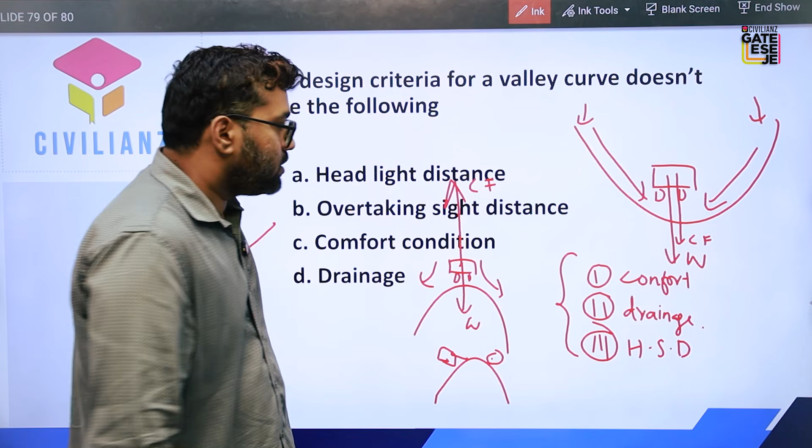So in this question, it is asked which design criteria doesn't include. Headlight sight distance is included. Overtaking sight distance is not considered. Comfort condition is considered, drainage is considered. So the correct answer is option B, overtaking sight distance. Okay, so with this our questions end.